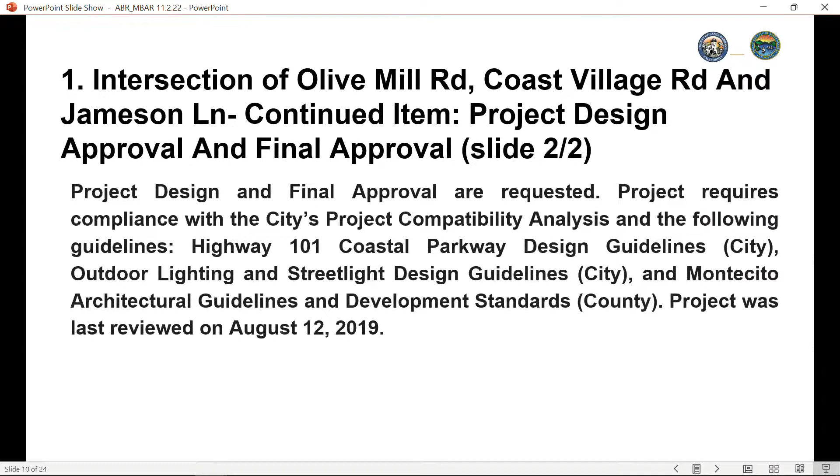Thank you, Chair Moore, members of the public. My name is Megan Arciniega, I'm the project planner for the City of Santa Barbara. I wanted to take a moment to introduce the project and why we're here and focus us on a review today. As you know, the proposed intersection improvement splits the jurisdiction between the city and the county.

We did a joint design review workshop prior to the application coming in, with a series of workshops with the applicant team. That's a requirement of the city's highway guidelines, that we do preliminary work and design. We went through that process for about a year, and then the application went through our coastal development permit process, as it did with the county as well, and we did a joint planning commission hearing with the Santa Barbara City Planning Commission and Montecito Planning Commission. The project received approvals from both planning commissions and has been working up to their final details to this point.

What you're reviewing today is a request for both project design approval, or for the county side preliminary approval, and final approval for both. The applicant has prepared final details with that in mind. Prior to this review, there were comments regarding landscape design, materials, et cetera, so we'd be revisiting that today. Your boards can take action for both PDA or final if you feel that is appropriate. I'm Megan Arciniega, the city planner, and Willow Brown is my county counterpart, at the end of the table, and she can answer questions relating to the county's jurisdiction on the project, if you have any questions in that regard. I think that concludes staff's presentation.

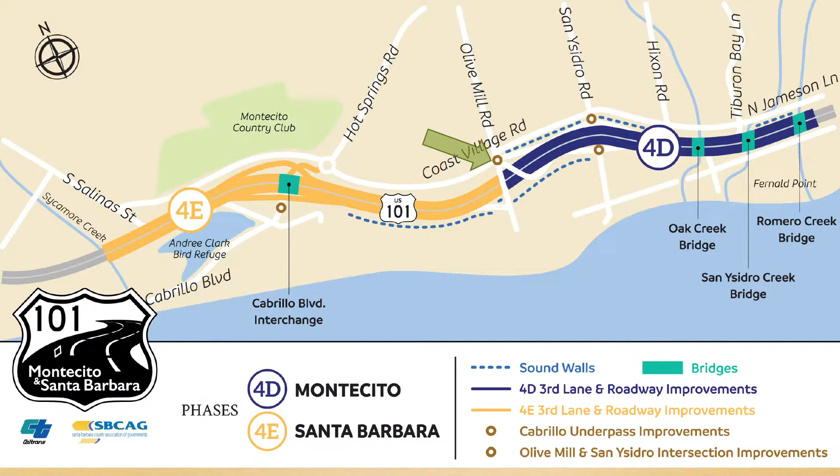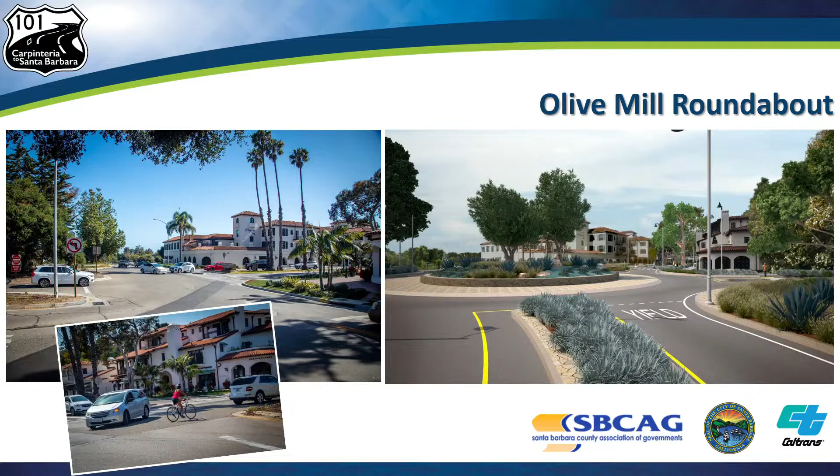Next slide. These are just a few of the renderings that were shown during the review processes for both the design review and planning commission hearings. This is a view as if you're right next to the Montecito Inn on the right-hand side, looking as if you were going to go through the roundabout to approach the southbound on-ramp.

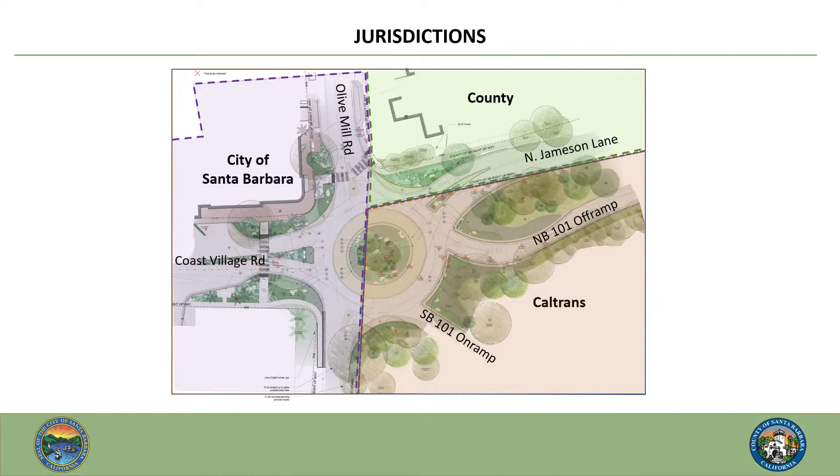So that's a super easy project to coordinate with - a lot of different jurisdictions fall right at this intersection. City of Santa Barbara is shaded in purple, that's our city limit line. In green, and basically everything to the right would be unincorporated county. And shaded with Caltrans is their jurisdiction as it relates to both the southbound on-ramp and the northbound off-ramp.

Next slide. So how are we all related for this? I am part of the applicant team and also part of the reviewing team as it relates to this capital project. When this project was initially going through, the City of Santa Barbara took the lead as the manager through the concept design stage all the way up to the coastal development permit processing for both the city and on behalf of the county. The county has also been a partner in the applicant reviewer role, and they took the lead on the San Ysidro roundabout. We took the lead on the Olive Mill roundabout with respect to permit processing.

Once we had the coastal development permit approvals, before going into final design, we had our original engineer, T.Y. Lin, and then that transferred to the Mark Thomas team. Mark Thomas is the final design engineer for both of those roundabouts and also for the freeway. It's very complex, knowing all the designs and how it relates to the 101 project. During this phase, SBCAG has resumed as the lead through the remaining process.

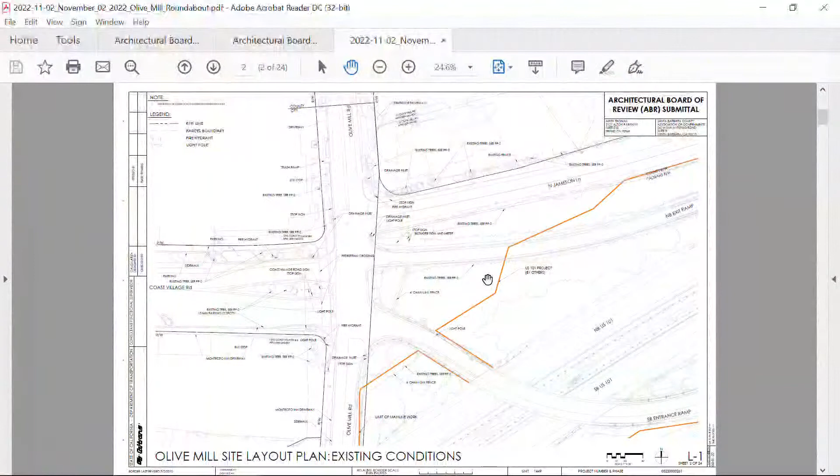This plan set that was provided kind of goes over the general pieces of it. So the title page shows the vicinity of the project and then the location, the existing features that are out on the project, planting areas that were previously developed, and then this is kind of the general layout of how the project will be constructed.

So right here you can see the existing off-ramp, North Jameson above, and Olive Mill going up and down through the page, and Coast Village off to the left. So the existing intersection comes together, and then it's going to get reconfigured into a roundabout configuration to help facilitate the traffic needs for this location. As mentioned, it's a mitigation measure for the HOV 101 project.

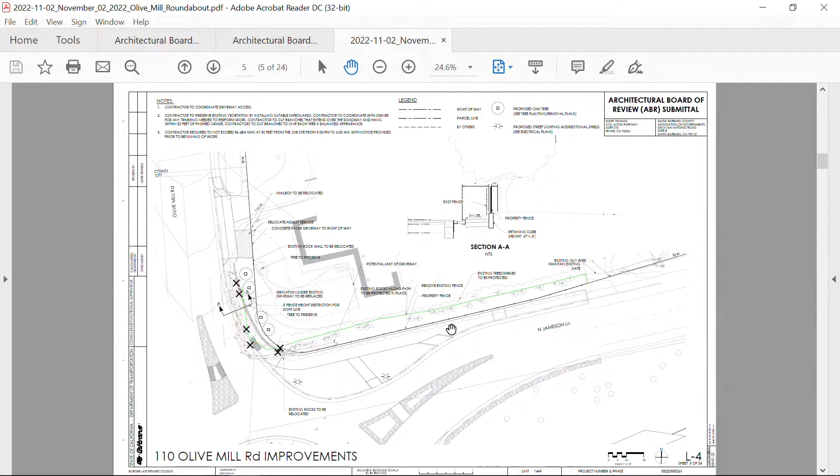We have a little rendering that touches on some of the properties at 110 Olive Mill, as there's some specific coordination that happened with that property.

As we reviewed the project from what was originally developed, we kind of - sorry, just to interrupt for a second, so we're all familiar with the project. I would suggest, in the interest of time, that we hit the points in the motion that we made, and then any changes or enhancements that you've made since that time. Yeah, I think that would be perfect.

Getting to that point, this is one of the enhancements we actually made on the project - the bus stop. One consideration was to get the bus stop to a point where it wasn't impacting the driveway, which is just above the page here, the exit for the Price property. So we refined the geometry a little bit to bring the bus down and be able to utilize the existing bus stop that's currently there, and have it come in and out. That was one of the refinements that happened with the project.

I'm going to zoom back up really quick to the overall. This extension of the driveway was also extended with the project. Originally, the project stopped right at the driveway. With request, there's some ADA improvements and landscaping that was added to the project to incorporate and include that driveway. So that driveway was added on. Overall, that's the major changes that have happened since the prior iteration - it's basically stayed the same shape and meets the same performance checks that were originally developed.

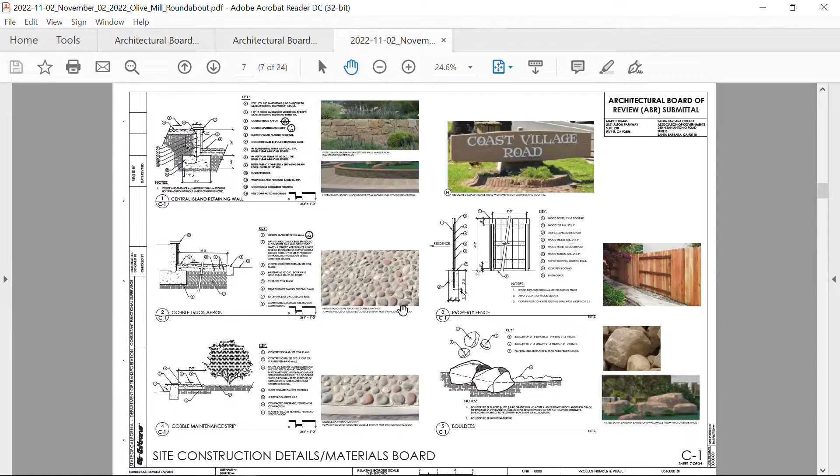Along with being able to accommodate all the vehicles, there's some truck aprons for off-tracking and stuff like that. So there's aesthetics here for the truck aprons and the rock cobble that tends to be used. The intent is to match the Hot Springs roundabout for a lot of these aesthetics and look.

These are just some additional pieces. There's a driveway being reconstructed, and so there's a concrete paver that's being used, and the look that's intended for that.

And then we'll get into landscape - I'll turn it over to Christine to talk about that piece.

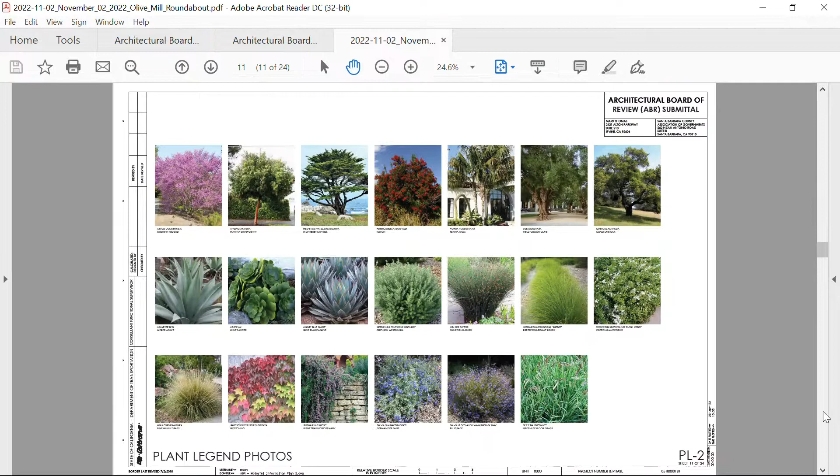These are the plant legend photos we've been using, consistent with the original approved plans, and the olive mill planting plan, as you can see here. Everything is very consistent with those plans. There have been no further changes.

There is one inconsistency on this plan, which is that it shows the palms will be relocated. They cannot be relocated within the project area, in this confined space. So they will be relocated and/or mitigated as part of the greater mitigation plan that's part of this overall plan. We can't accommodate all the mitigations on this particular site because of the sheer numbers required.

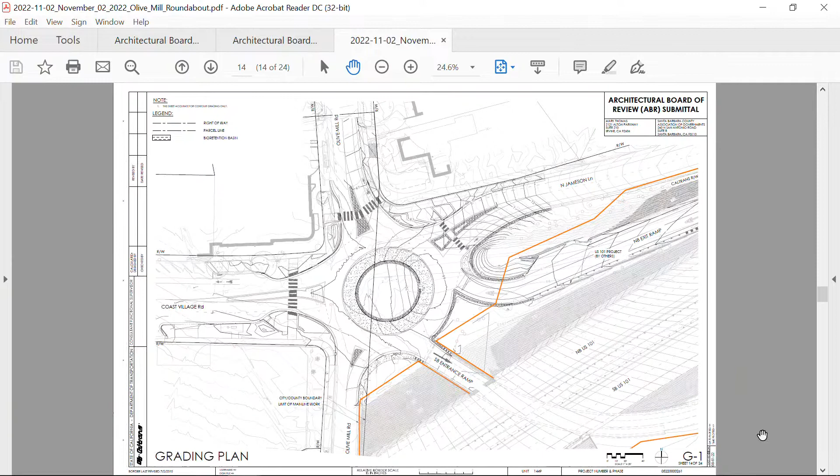So that basically covers the changes that have happened. We've tried to stick with the original concept and maintain it throughout the process.

Excellent, concise, I like it. We are going to move to, I guess, do we need to do public comment for the city?

Then the last question I saw on your detail sheet, a fence detail—is that the neighbor's wooden fence I saw? Correct. The current property line along there, it's kind of hard to see, but the existing fence line is off of their property line. Part of the project is to relocate the fence onto the existing property line so it defines the correct limits of the property.

Through the iteration of boundary limits of the project and developing the site, we found it was pushed out a little bit from where it currently is, so the fence is going to be redefined on that new line. Does that just match what's there? Exactly, yep, a cedar fence. Okay, all right.

And then, I don't know if this is the time or place, but regarding construction staging, how are you going to sequence it and keep traffic rolling?

I'll go over it in large pieces. The first phase would be to close down the two ramps, and we're going to take on a large portion over here to stage the work. That'll get a majority of the project built while the ramps are closed. The intent is to only keep the southbound ramp closed for a shorter duration, so within a couple months we'll try to open that ramp back up while they're still working on this larger portion of the project.

Once that larger portion of the project is complete, they're going to move on to the northern corners and start working on those. With that work completed, it'll allow them to adjust the traffic over and be able to perform some work in that area. They'll work on those areas and then kind of work around the corner to complete it.

So at this point, the only on and off ramp would be fully closed at some point, but the other streets will remain open by shifting traffic back. Exactly—we're trying to keep the local roads open as much as possible.

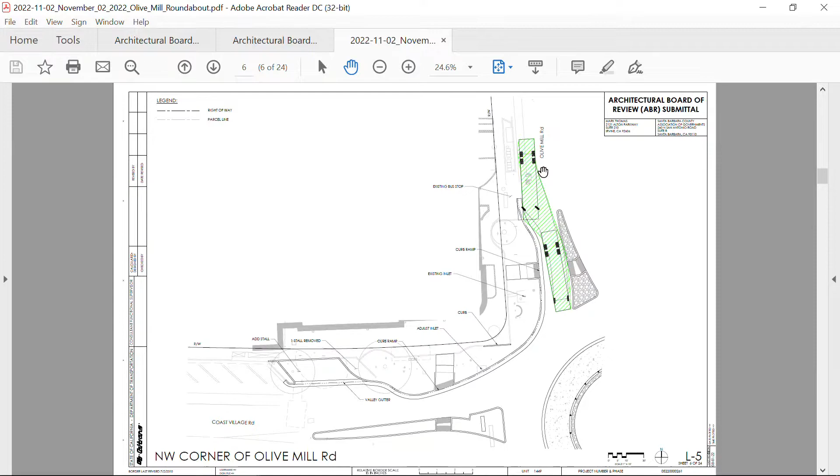I have two questions. One, it looks like the bus stop, when there's a bus there, is going to completely close down south traffic on Olive Mill Road—is that correct? No, actually the way it's set, it's probably hard to see in this illustration, but there's a stripe that'll end up here, and the center line comes off of the median, so there's actually room between there. It's going to operate very similarly to what it does now. So cars can go past it—correct. Very good, thank you.

There is a non-historical Biltmore sign—what has happened or will happen with that, please? That sign is being relocated with the project, into the project, correct. I believe these plans show the location it's being relocated to. It's currently in the middle of where the roundabout is. Could you take a moment at some point to show me, please? Sure. Thank you.

So the current location is approximately right here, and the new location is going to be down here. Very good, thank you very much.

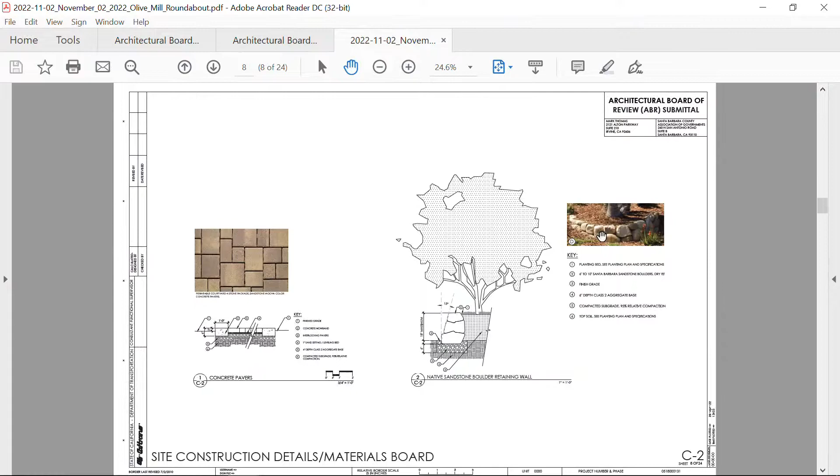Thank you. And then to Ms. Anderson, with apologies, there are irrigation control boxes somewhere in the irrigation, aren't there? Yes, yes, there will be. It's less about where they are as to what they look like and how big they are - are they buried in landscape, et cetera?

Right, so these are meeting a Caltrans requirement to be placed in a strong box container, so it'll be a pedestal container. Let's see, do we have the area? Yeah, so the meter and controller will be right here. It is a pedestal mounted controller inside a strong box container, so it's a stainless steel container.

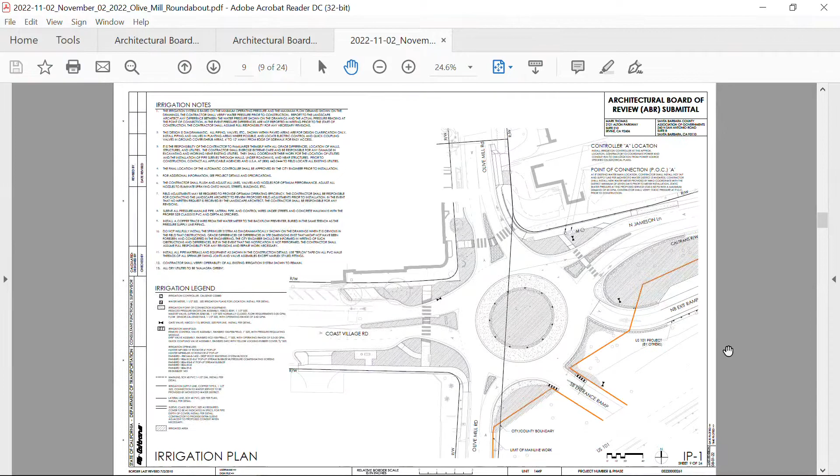Were any images of that box in the set that you could show us, or could you describe visually how big the pedestal box containers are? Right, so there are no details on that in this set of plans, but they are approximately about 3 feet high, 18 by 18 in width and depth.

So there will be 18-some inches visibility from the bike path, the shared bike pedestrian way, but the intention is that the landscape will cover them. What the plan is - these plans are very schematic, as irrigation plans are very difficult to show the precise detailing where they'll be. So the intent is for these pieces of equipment, including the backflow preventer, to be placed in the planter that's closest and to be obscured more or less with plant material so that it's not visible from the street or from pedestrians. Those are all my questions.

I would suggest if you wanted to show those relative to the planting plan, that would be really helpful to answer some of these questions. All right, thank you. Could you do that? Yes.

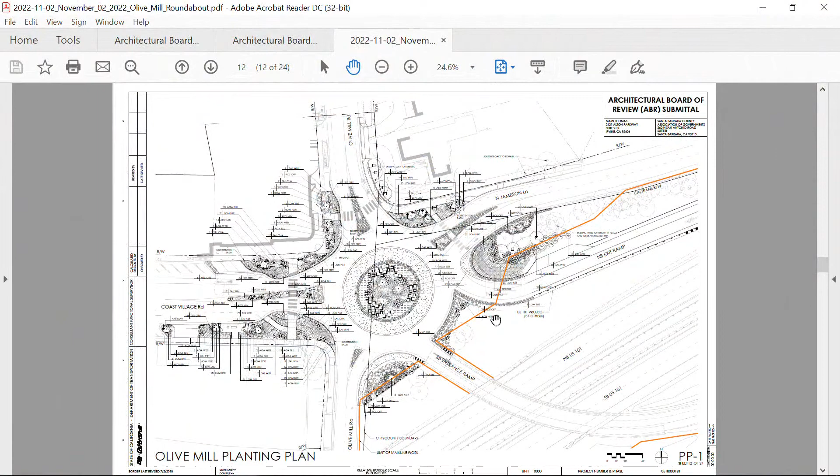Let's see, the planting plan is - and let us know what is planted down here. So those are right in this location. And what's the planting around it? There we go, so they will be approximately right here.

The plant material itself - so we have this, a cypress, a Monterey cypress. We have these, cercis right here. We have some agave. Let's see, it looks like some salvia along here. I'm having a hard time seeing it here, it's a little obscured with the lighting.

Those are my questions. Chair Moore, it is a point of contention of mine that irrigation plans seldom, if ever, occur on landscape plans, so I'm glad we had the opportunity to review this. Yes, and some coordination is required there.

That's better, I can see my plans there. So we also have Lomandra, and in the front, in this area, this little hatched area is Juncus. This is for a portion of the bioretention area, bioswale area.

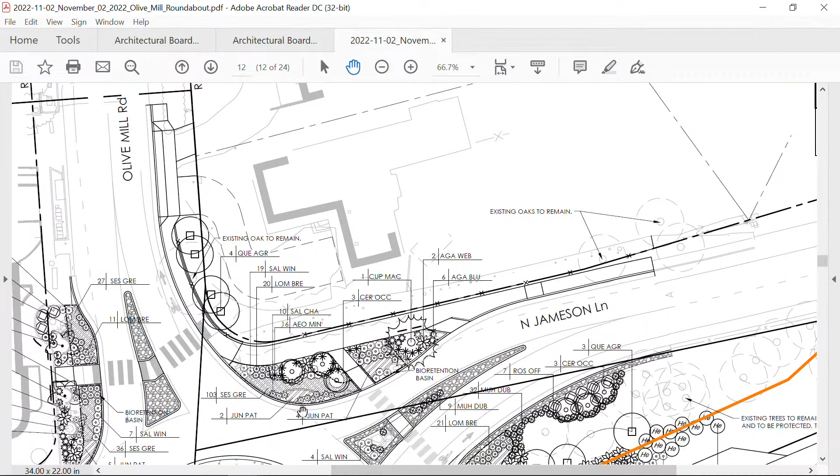However, because of the nature of the roundabout, we also have to provide sight lines. As traffic is moving through here, we can't obscure any sight lines of oncoming traffic. So we've tucked everything, all the irrigation equipment, back as far as we can away from this roundabout. But anything taller than that would probably obscure sight lines.

Okay, thank you. Ms. Anderson, questions? No questions. Okay, down here, Mr. Noon, questions? No questions, thank you. Mr. Black? Simple questions. Thank you.

Because there are 3 different jurisdictions sort of governing this project, who's going to be responsible ultimately for the landscape maintenance in the long run?

Board Member Black, through the chair: for this, we're still finalizing all of the details, but for the city of Santa Barbara, we'll be maintaining the majority of the landscape adjacent to the Montecito Inn and the Price property, as well as the center of the roundabout. Details to follow on the county side, but it's mainly the city of Santa Barbara with respect to the landscaping. With the on and off ramps, any landscaping associated in that area, it is the city's preference for Caltrans to maintain that portion.

David wasn't clever enough to phrase this as a question: the detail for the wall at the turnaround, at the center circle, shows 1.5 inch sandstone veneer, which you're not able to do in real stone, whereas the Hot Springs Circle has real stone, and it's very evident that the top cap is at least 4 to 4.5 inches thick, maybe 6. So is the intent to match, and therefore we're going to get real stone there?

Or are we going to get the faux concrete stuff? The intent is to match the Hot Springs roundabout with real stone. In fact, we just used a very similar detail at the Sheffield off-ramp in Montecito, so you can see exactly what it looks like - it's almost the exact same. Then you'll have to revise your detail to the appropriate thicknesses. Right, we can revise that. Thank you.

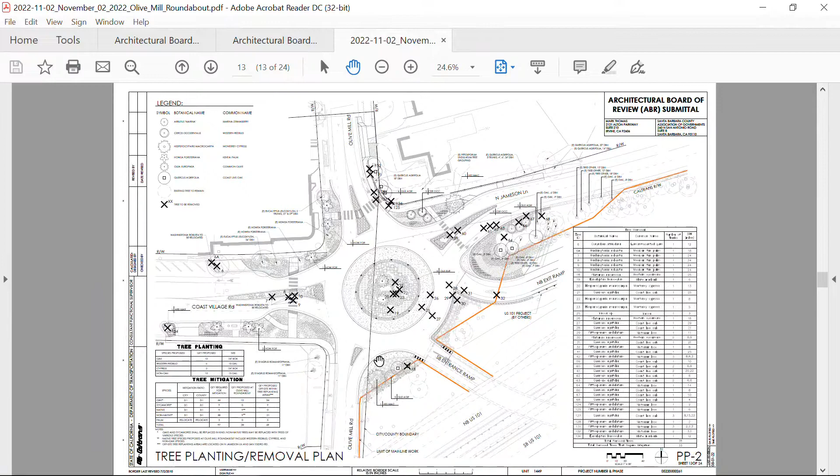Or you redo the sign? I don't know how the placement is oriented, but I don't believe they're rebuilding it - I think they're just relocating it. But we can look at how that configures and lines up. I think the only new people who'd be able to see that arrow going the opposite way would be people coming on the off-ramp from 101, and that's quite a ways off. It just seems to get lost in the location right now. That's my questions.

Okay, Vice Chair Six asked all my questions except for one. Can the irrigation box be painted green instead of stainless? Yes. Great, okay, that's it. Say that again, I didn't hear you. Irrigation box, green, not stainless. Oh, green, okay, okay, so that's it for questions.

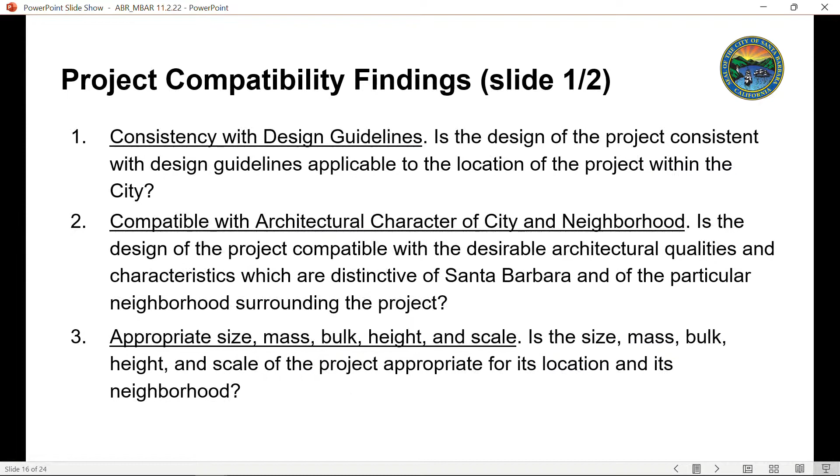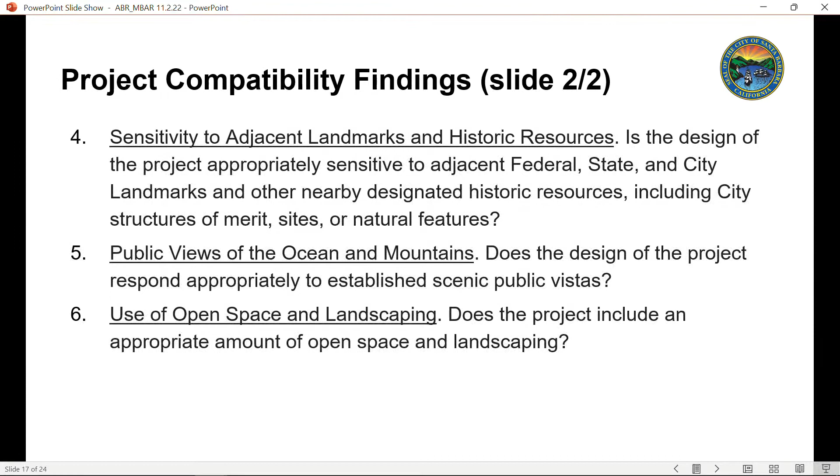Number four, as far as we are aware, there is no adjacent landmark or historic resource. Number five, it does not impact public views of the oceans and mountains. Number six, it does use appropriate landscaping, and it is all about open space. Okay.

Just for the historic landmarks, the Montecito Inn is okay, it's a landmark. There was a historic structures report done during environmental review, so just to reflect that it is adjacent to a landmark.

Let's adjust number four so that we find that it is sensitive to the adjacent landmark. Okay, all right, I think that's it for us.

Members of the board, I see no reason to complicate this. I would love to just take their exact wording for the motion and make it our motion if everybody agrees. That's fine, yes. So, having said that, I make that motion. Is there a second, please?

Second. Any further discussion, please? See how easy it is? All those in favor? Aye. This is for preliminary only. Oh, so hang on.

Final, hang on. So what I'd like to do, if we can before we adjourn - I have no interest in slowing this thing down or stopping. Do you want to be on a subcommittee?

I guess so. Yes, and Claire, we can have a total of three. Anybody else want to be on it? Okay, so Bill and Claire will be representing us at the meeting, at the consent.